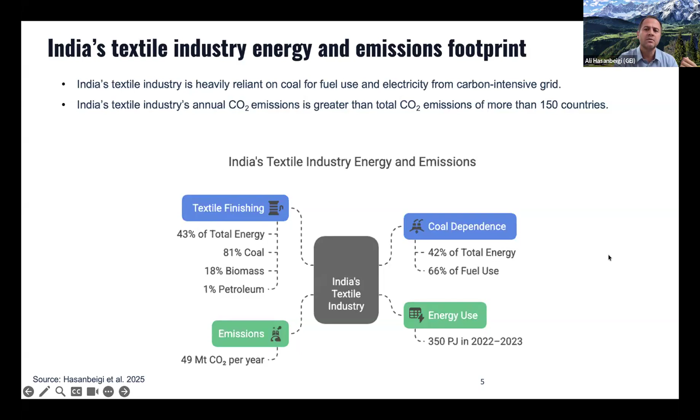So it's a big number we are speaking of. Therefore, a big challenge, but also a big opportunity to decarbonize. A significant portion of fuel used in the Indian textile industry is fossil fuel. Some biomass is also used, and there's a fair amount of dependence on coal, which is very carbon intensive. So that's what we want to decarbonize. Electrification allows us to phase out fossil fuel and then tie electrification to renewables in order to decarbonize.

In a textile plant, I think the majority of people in this session are working in textile companies one way or another. So you use electricity and you use fuel. A significant portion of fuel is used for heating, especially in wet processing facilities where we have pretreatment, dyeing, printing, finishing, etc. The electricity component to decarbonize is becoming more and more straightforward in many geographies, and fortunately in India, the past 5 years especially, a lot has changed in a good way, moving in the right direction with regards to corporate renewable energy procurement, which Puneet is going to talk about.

India is actually one of the best geographies in Asia when it comes to corporations procuring renewables. So that's good news, and it's more straightforward. We're not saying it's easy, you still have to go through the steps, but it's more straightforward. It's the heating that is challenging - how to decarbonize heat, meaning deep decarbonization towards net zero. That's where people are scratching their heads, and that's where electrification offers a real long-term decarbonization solution.

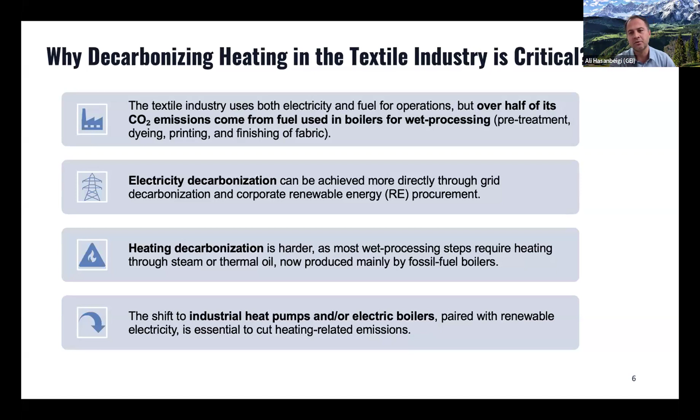Those are technologies like industrial steam generating heat pumps, electric boilers, and other technologies we have discussed before. But the two main technologies are industrial heat pumps and electric boilers that can replace conventional fossil fuel boilers, and then tie that electrified heating to renewables. There you go - you can get to net zero if you do it today, even today.

So we published a few months ago a major report, about 100 pages, on electrification of heating in the textile industry in India, where we did the analysis at 4 different levels: at the national level, at the state level for 3 major states - Gujarat, Tamil Nadu, Maharashtra - and at the cluster level, we did analysis for the Surat cluster and for a typical wet processing plant in India.

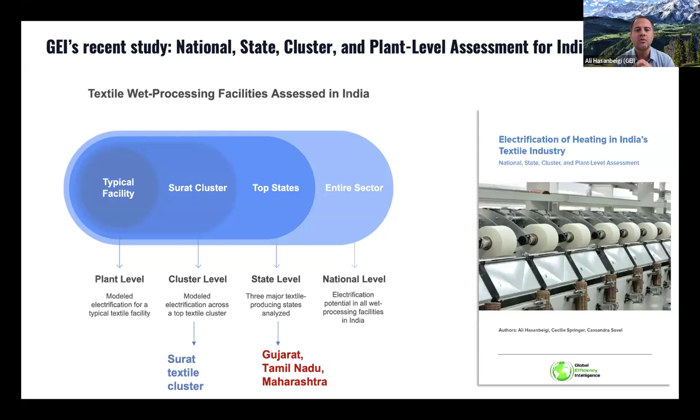We published a detailed techno-economic analysis of it - how much the savings, how much CO2 reduction, what would be the cost. So there you go for all the 'what' and techno-economic data of everything we are discussing today. I'm not going to talk much about that today, but that by far is the most comprehensive report published on this topic for India, I would say.

But very briefly, for those of you who may not be familiar, the two major electrification technologies are the heat pump - industrial heat pump - and electric boilers. When I talk about heat pumps today, I mostly mean a steam generating heat pump, because we do need steam for many processes in the textile industry. Even if they have lower temperature requirements, steam is needed to deliver the heat.

Heat pumps have been around for decades actually, there's nothing new about them. And steam generating heat pumps for high temperature are just emerging more and more, but they have been commercial, they have been around. The reason they have not been adopted is because the preconditions were not there - the economics, renewables, the policies, etc.

But now those preconditions are lining up. A heat pump is basically like an AC in reverse, like air conditioning. So it gets heat from a lower temperature. It's preferred to have some base heat, then uses electricity as an input to lift the heat and

delivers it at a higher temperature. It moves heat, it doesn't generate heat the way a boiler does. As a result of this moving heat, it can have extremely high efficiency, which is measured in terms of coefficient of performance, or COP. Heat pumps can have a COP of even 6, 7, or 5, but those are for lower temperature and smaller temperature lift. For a steam generating heat pump that we are talking about today, COP is usually between 2 to 3.

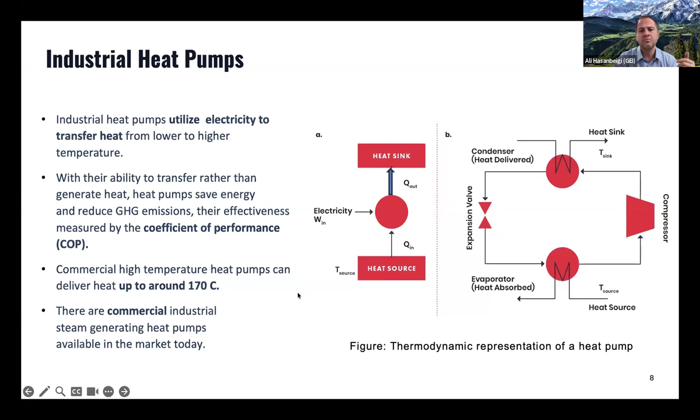In simple terms, that is 200% to 300% efficiency for steam generation. Compare that to 70% or 80% of a conventional boiler. So you can see heat pump is extremely efficient, and it can deliver steam up to around 170 degrees C, and some claim even higher.

Very briefly, some results of the study we did for India. This is for a typical textile wet processing plant. If you install a steam generating heat pump compared to a conventional coal boiler, what would be the annual energy use and annual CO2 emissions? The graph on the left shows the annual energy demand for a typical wet processing plant in India with 8,000 tons per production. You can see the conventional boiler requires significantly larger energy compared to the heat pump because of the efficiency gain I just told you.

And translating that into CO2, you can see the significant drop in annual CO2 emissions. The first bar is the conventional steam boiler, coal boiler, annual CO2 emission. The subsequent bars, the green ones, are for the heat pump in 2030, 2035, and 2040.

The emissions associated with heat pump operation, of course, depend on where the electricity comes from. So we have two scenarios here. The first bar for heat pump shows a scenario where we assume 50% of electricity comes from the grid and 50% through corporate renewable energy procurement, which Puneet is going to talk about. This is possible even today in India, by the way, we are not just hoping for something in the future.

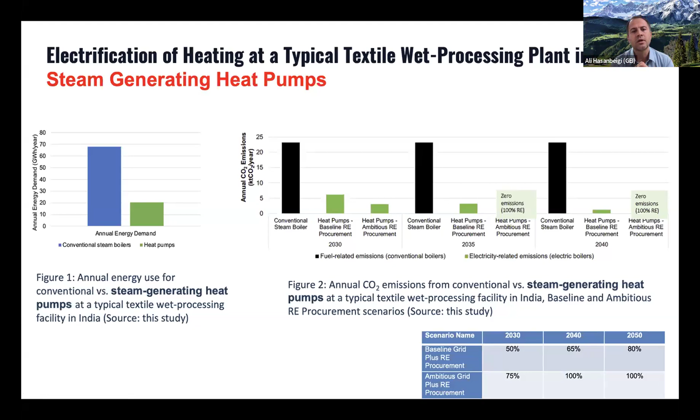And then as the grid decarbonizes, or as you include more renewable percentages in the electricity supply, you can get to significantly low emission or even zero emission. So this is a snapshot of some of the results of our analysis. Much more you can find in the report.

Electric boiler is another technology, completely different. It's fairly similar to a conventional boiler, but instead of using combustion fuel, it basically uses electricity. It's like your stove can be natural gas or can be an electric stove - it's basically the same concept, electric heating. I won't get into the detail of the technology.

There are different types for small or larger boilers. But electric boilers, basically industrial electric boilers, can give you efficiency of 99% compared to a conventional boiler of like 70 to 80%. So they're very efficient, but they are not as efficient as a heat pump.

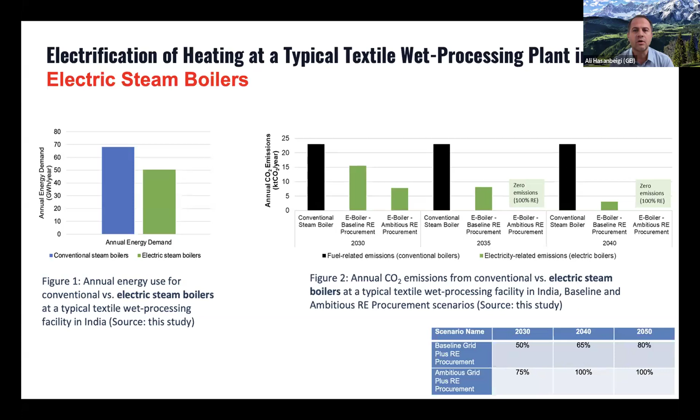Therefore, the technology of choice usually for electrification is the industrial heat pump. But industrial heat pumps have high capital costs, high capex, whereas much significantly lower energy and operational costs because of efficiency gain. Electric boilers, on the other hand, have fairly low capex - they're cheaper than even coal boiler or biomass boiler, but they increase your energy costs because electricity is more expensive. So there are pros and cons, and certain decisions need to be made based on that.

We have all that analysis and results in our report again that I showed you. But one snapshot of the cost analysis: we put all the costs - capital costs, operation costs, energy costs - into a framework of what we call levelized cost of heating. You annualize all the costs over the lifetime of the technology, take the net present value of that, divided by the heating it provides, and you get a dollar per megawatt hour of thermal energy provided.

These are based on actual cost data in India, so we have not made this up. This is also despite the fact that heat pumps have significantly high capital cost.

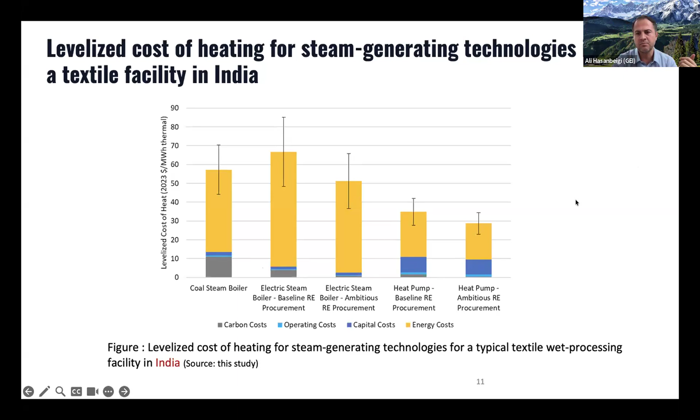So that was a very quick summary of a 100-page report into a few slides on why to electrify and what electrification is at a very high overview, and also what is the impact on CO2 and energy cost. Now let's focus on the main reason we are having this workshop: how we can electrify. To do that, we go through certain steps on how we can integrate electrification technology into a textile plant in India.

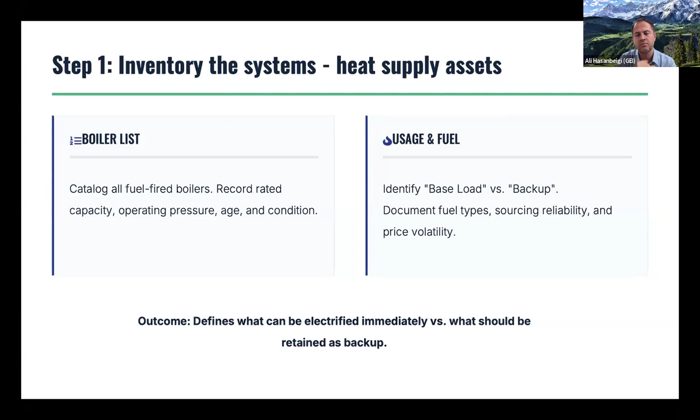This will help you define, based on your load and equipment, what you can electrify now or in the short term, and what you basically keep in terms of fossil fuel, and later on you can go and electrify.

So again, part of step 1 is mapping your steam demand. As you all know, steam is used in different processes, different machines, not in the same way, not in the same kind of pressure, temperature, time. So you need to map your steam demand and have your actual demand that is needed in different processes.

As you know, actual demand is definitely much lower than the installed capacity, and that comes into picture later on, as you will see. So you need to know what's your minimum demand, what's your average, what's your peak, and this will help you significantly to size your system properly, which has significant implication with regards to operation of your system and also cost.

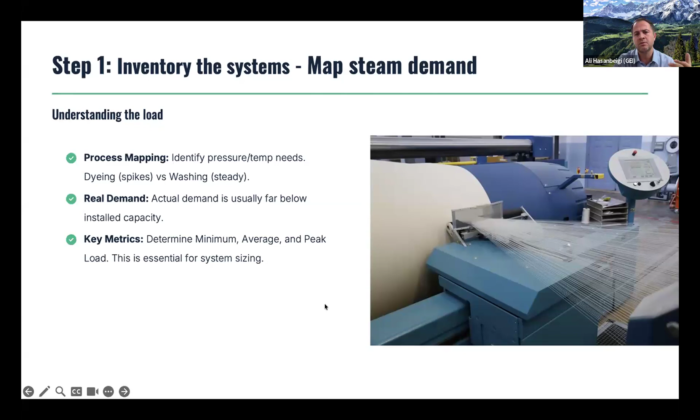Part of step 1, again, inventory of the system. You need to establish a baseline for your plant with regards to fuel use, energy use, emissions, and cost.

Fortunately, as part of your reporting, perhaps to different brands or other requirements, you might already have this: how much fuel you are using, what's the efficiency of your equipment, what's the emissions associated with the energy use, and what's the cost in terms of energy cost per kilogram of fabric, steam cost per kilogram of fabric.

One thing we would recommend also is levelized cost of heating. Actually, we have a tool that can calculate that for you. Later I will show you. So the more detail, the better, if you have this information.

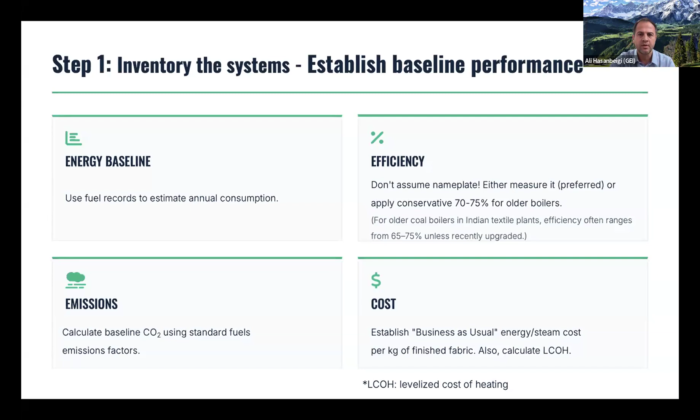This is all part of step 1. So step 1 is to establish the baseline, the data, and the better data you have, the better decisions you can make. Step 2 is selecting the strategy for electrification.

So electrification in one line is not an all-or-nothing decision. A lot of you might look into it and say, okay, this is not for us because, for example, our peak cannot be met with industrial boiler, electric boiler, or heat pump, and so on. This can be a hybrid strategy, which actually is what we are recommending, and a phased approach.

So what is this hybrid strategy that we are proposing? Meaning that you have a design where you electrify part of your load, let's say 70% of your load, could be 50% of your load, and should be base load most likely, especially if you are using a heat pump. And then for your variable load or peak, you can still continue to have your fossil fuel or biomass boiler as the peak or backup. And then in later stages, you can electrify those as well.

So this actually has an advantage because you are going to have some need for electrical infrastructure to connect your electrified heating. And the lower load that you have, the easier it gets to connect your new electric load, the heating, to the grid and so on, reducing the cost.

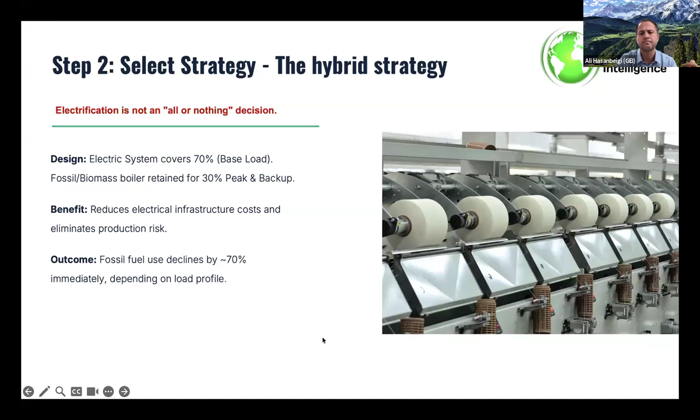But at the same time, even if you electrify 50% or 70% of your load, you're significantly reducing your emissions, and I'm sure you will meet many of your near-term targets. So keep in mind, hybrid strategy.

Technology selection. We have discussed it extensively in our reports, the one I showed you for India, but also we published two major reports in the past year. One was called Low Carbon Thermal Energy Technologies for Textile Industry, another one called Low Carbon Thermal Energy Roadmap for the Textile Industry. Each of them a 100-page report. It was supported by Apparel Impact Institute. I highly encourage you to look at those reports where we show the pros and cons of each of these major technologies.

But for steam, basically your choices are steam heat pumps or electric boilers. Steam heat pumps is the technology we would recommend first because, I mean, it's a no-brainer. You have a technology that has 200, 300% efficiency. Why would you go with a technology that has 99% efficiency?

But it does have high capex. So if you cannot afford that higher capex, then you can go with an electric boiler. And even though nominally it might have higher energy OPEX costs, there are conditions where, depending on your tariff, renewable procurement rate, etc., you could even in the near term get lower energy costs compared to boiler, including some carbon costs, etc. So it's not that electric boilers are bad. It's just that you need to look at all the pros and cons and your own conditions.

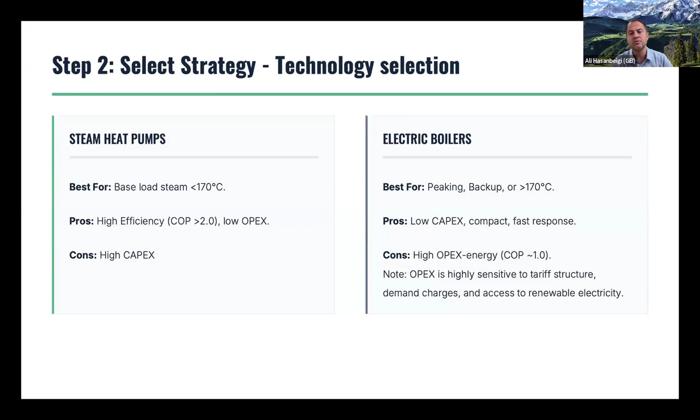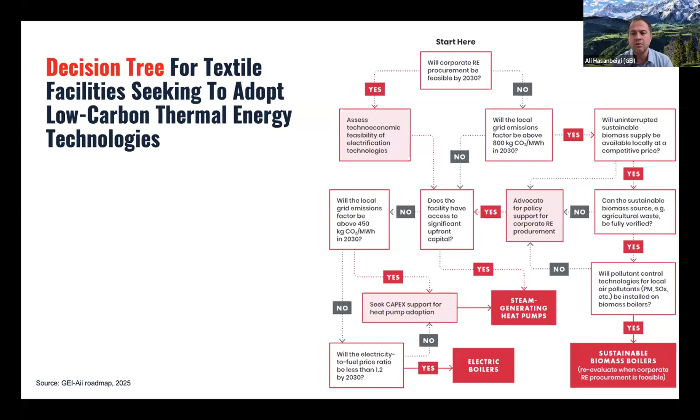To further help you, we developed this decision tree for textile facilities that want to adopt electrification technologies or look into biomass. I don't have time to run you through this decision tree, but basically, depending on your corporate renewable energy procurement options—which fortunately in India are moving in the right direction—and your electricity to fuel price ratio, it will guide you whether to install a steam heat pump or electric boiler. If certain criteria are met, it also guides you that it's okay to have a sustainable biomass boiler in the near term, but later on you can reconsider. So check out that decision tree from our previous publication.

The next step is assessing your infrastructure, because you get significant additional electric load that you need to connect, so you need to be prepared for that. Estimate your load first—if you electrify, how much will be your additional load? It's significant. Keep in mind, one additional benefit of a heat pump is that because of its 200 to 300% efficiency, it needs significantly lower load compared to an electric boiler, which saves you a lot of headache and cost when it comes to load connection.

But you need to look at your constraints too. For example, you might have a 1000 kVA connection, but if you electrify, you're going to need 2000 kVA—what do you do? The first thing you can do is talk to your electric utility and have them upgrade your substation. Or you can take a phased approach, and instead of electrifying 100%, you electrify depending on conditions, for example 50% or 70%, which means reduced load demand as well. So there are things you can do, but first you need to know what your load would be, and the tool I'm going to introduce will give you that answer.

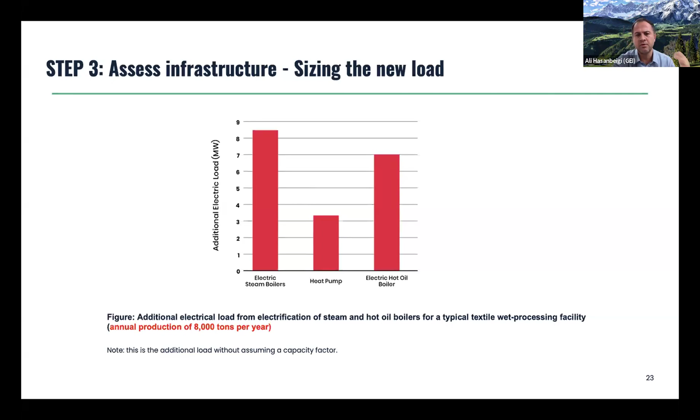In the study we did for India, for a typical wet processing facility with 8,000 tons per year production, we found the additional load is a bit higher than 8 megawatts if you use an electric boiler, but significantly lower—a little more than 3 megawatts—if you use a steam generating heat pump, because heat pumps are significantly more efficient. If you electrify your thermal oil boiler, which we're not talking much about today—you need a thermal oil boiler to have hot oil go through your stenter for heat setting—you can electrify that too. For such a plan, you would need around 7 megawatts additional electricity. These are the numbers; if you have significantly lower production, you can scale from there.

Once you have a good understanding of your load, step 4 is evaluating feasibility—technical and economical. For technical feasibility, you need to figure out how this new system, heat pump or boiler, gets connected to your existing facility. Space—they're going to need space, so where do you put all this? They're going to need maintenance—where do you get the maintenance service? You can do some in-house, but you need additional support. The best approach is to engage with vendors from day one. They will literally come to your site, visit, and tell you all the things you need and all the constraints you have, so you can make an informed decision.

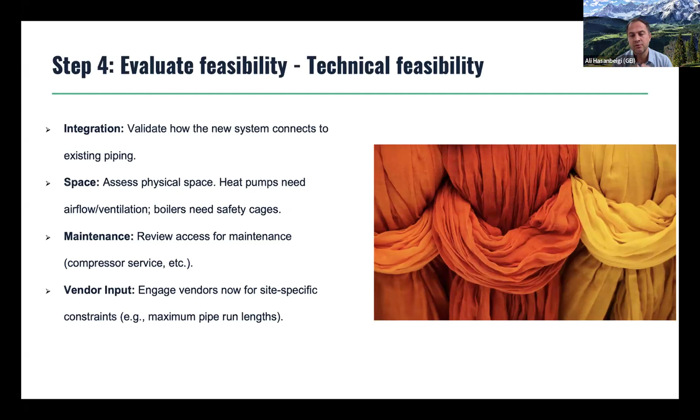Continuing on step 4, evaluating feasibility for production risk and quality—it looked like you were not that concerned about it from the poll. But these are slightly different technologies; heat pumps and electric boilers actually have more advantages, such as a faster ramp-up rate compared to coal or biomass boilers. That's an advantage, but you need to be aware that temperature stability is important, for example for dyeing. So from day one, involve your production and quality team, and they will tell you exactly the spec they need, so you design the system based on your production demand. To mitigate any risk, you can do electrification in a phased approach, as mentioned earlier. Typically, you want to run a steam heat pump as base load, very efficiently, and then have a boiler for the peak or variable load.

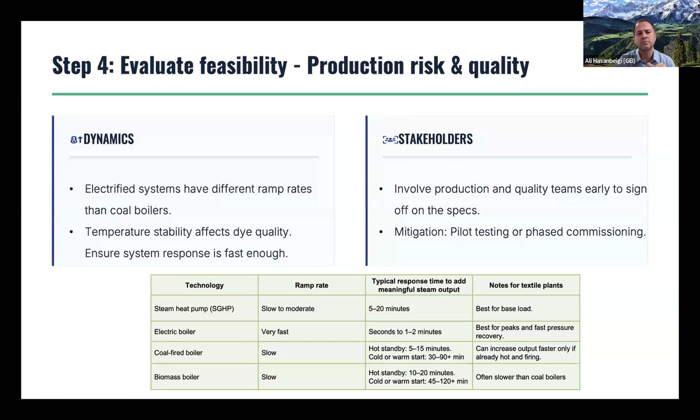Part of step 4, evaluating feasibility, I talk about technical and economical feasibility, CO2 and cost. So we do have a textile heating electrification tool, which we developed and published about a year ago. It's available for free in 6 languages.

You can download and use it today. It does a fairly sophisticated pre-feasibility study that if you hire a consultant, they would charge you tens of thousands of dollars. The tool actually has 2 modes: simplified analysis and detailed analysis.

In the simplified analysis, you can put just a few numbers about your production and annual energy use, and the tool has default values and will do the rest of the calculation by itself. Of course, if you run the detailed mode and put your numbers, the results are more customized to your situation. So we encourage you to run the detailed mode.

It does the techno-economic analysis, giving you information on heat pump, electric boilers, your current conventional boilers, coal, biomass, whatever you put in there. Also thermal oil boilers, if you electrify them.

It compares the annual energy use, annual CO2 emissions for 2030, 35, 40 running into the future. You can run scenarios with regards to renewable energy procurement percentages, and it can really do a fairly good detailed calculation depending on what numbers you put there.

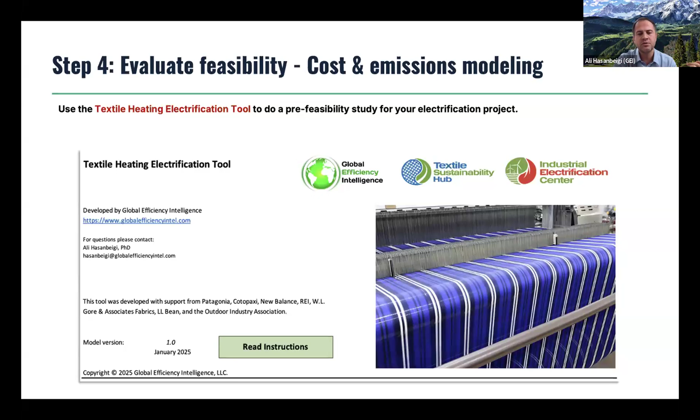And it does have a simplified action plan based on the result of your analysis. So once you get your result, based on that result, you get some action plan. It's a fairly detailed tool, I would say, while it's user-friendly and Excel-based. So I highly encourage you to run that for your electrification effort.

Moving on with step 4, the last part is you need to include non-energy, non-monetary benefits. Often electric technologies have better control compared to combustion technology, and better temperature controls and others improve your production quality and reduce waste, saving you money.

As I said, electric technologies have faster ramp up, so that helps you with production flexibility. Often the O&M is lower for electric technology, and they are cleaner. You have literally no local pollution, no air pollution, a safer environment for staff to work.

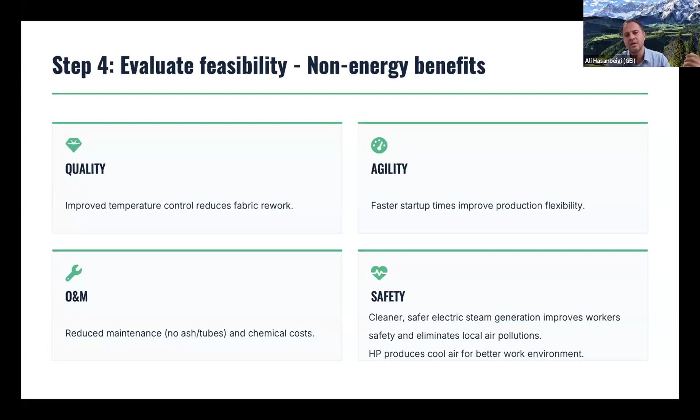And heat pumps actually generate cooling as a byproduct, which you can use for cooling the factory floors, the office workers, and all that. So it improves the working environment. These all have value that you need to take into consideration.

So I thought it would be helpful to also show some common mistakes that textile mills could make when electrifying. And I just got the alarm on my phone that I need to start wrapping up. So one common mistake is basically not sizing the system correctly.

You need to know your actual load, your actual temperature and pressure requirement, and don't size the system based on the nameplate, because that will significantly increase your capex and also significantly increase your future opex. Also, lower load demand is easier to connect to the grid.

Do not need to electrify 100% from day one. If you do, great. But if you cannot, you don't need to. You can do the phased approach.

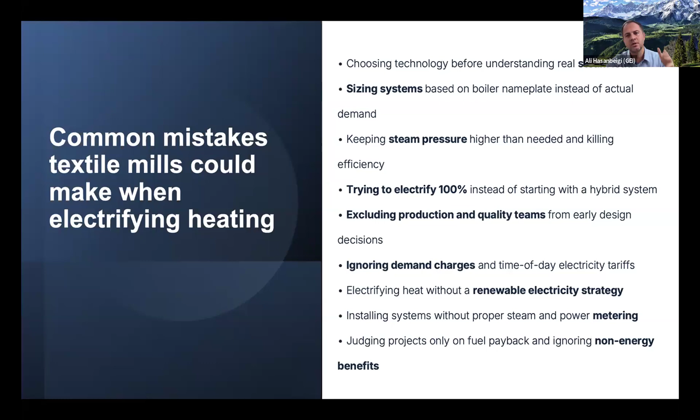Do not ignore the demand charges and other charges that your electricity bills have. You need to take everything into account when you do the economic analysis. And you certainly need to have a renewable energy procurement strategy from day one. Even though you want to do it gradually, you need to have that strategy from day one.

So let's move on for the interest of time. Financing, where the money comes from. You need to get the money from somewhere.

If you don't, you can go to the brands, if you're working with brands, supplying them. There are brands that are supporting decarbonization, even electrification. H&M and others, they are there. You can talk to them.

There are various strategies they use. Apparel Impact Institute, AII, published a report last year, Brands Playbook for Financing Decarbonization. It has a number of strategies there.

You can go to banks, especially banks that have green loans. In India, for example, SIDBI and others do have loans for decarbonization technology, electrification included.

And there are grants, like straight up free money. Apparel Impact Institute has actually a grant directly for electrification projects. So if you're considering electrification, the first thing you need to do is contact AII, because you might be able to get some money for your project.

I highly encourage you to read them, even though they're written for brands, but you are the supplier. You can see which one could work with you, and then discuss that with the brands you are supplying.

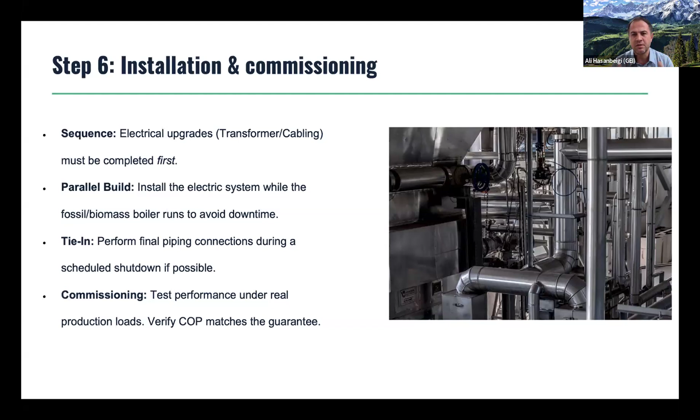To wrap up, once you have the financing, you procure the technology, then go for installation and commissioning. You need to sequence things: electrical upgrade, transformer, etc., need to happen first, or at least in parallel, before you install your heat pump, for example. You can build your electrified technology system while having your production running smoothly, and then once the project is complete, do the connection, preferably during the scheduled shutdown period. Then you have to test performance in the beginning, see if the COP, for example, the efficiency, is as the vendor advertised, and make sure everything runs smoothly.

When the operation starts, or before it starts, you need to train your staff - very important, how to work with the new equipment and the safety protocol. By the way, that's not a big deal. Industrial companies always do that, so it's not a deal breaker or anything.

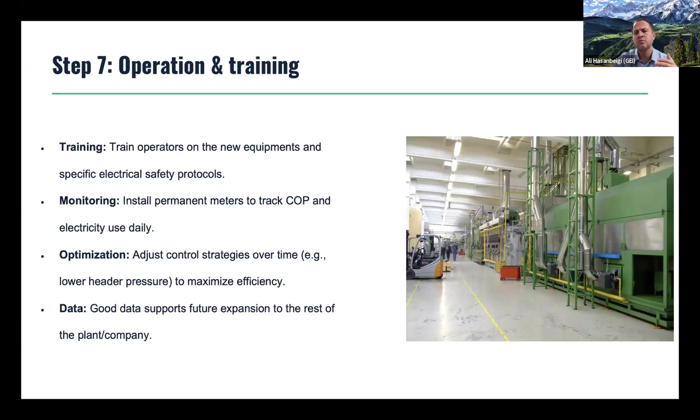Install a permanent metering system to measure efficiency and do optimization. One advantage of electric technology is that measuring electricity is much easier than measuring, for example, steam, and it's much cheaper. So you can take advantage of that, do proper measuring, and based on that, do optimization. I'm hoping with AI and everything, you are going to see advanced optimization systems come on top of these electrified technologies. Good data can help you with optimization and then help you with the expansion for the next phases.

The last step is self-explanatory: review what you have done, how things are performing, learn from the mistakes, the lessons learned. Most companies we have worked with have a second plan, then scale from there. But having learned what you have learned, I think the second project will be smoother. Or within the same plant, if you just electrify part of your load, like one boiler, you can gradually move to the next.

With that, I went a bit over time - sorry, Puneet, but thank you. We do have that report mostly focusing on the why and what of electrification, and we do have a chapter on how. But I hope you found this presentation helpful in terms of walking you through these steps. With that, I'll stop here and take questions at the end of our workshop, but I'll hand it over to Puneet to tell you the steps for corporate RE procurement, which you tie to electrification in order to get to net zero, or towards net zero. Puneet?

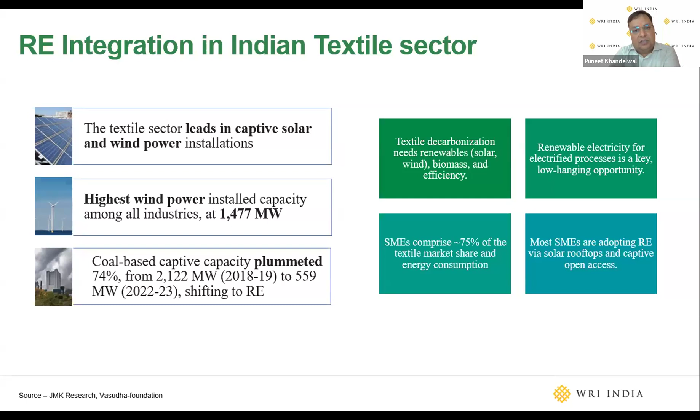One thing specifically to note about the textile sector is that it has a mix of all kinds of enterprises, from integrated mills to the MSME supply chain, small players as well as large players, which have different consumption loads across the supplier value chain of the textile sector.

The key growth drivers specifically for the C&I segment are definitely the ever-increasing cost of retail tariffs of utilities, where the C&I or commercial industry sectors suffer from the heavy burden of cross subsidization from other categories of electricity consumers. Power deficit is a critical risk with emerging demand from sectors like industrial heat and data centers - the scenario is building that if sufficient power is not there, cuts can be made to the industries.

Over time, we have seen that the RE market has developed a lot with many emerging options also there, as well as lowering cost of the existing and orthodox options in RE.

On regulatory compliance, this is also coming up and developing, with more enforcement now being applicable to the C&I sector with RPO obligations in place, and emerging compliances with respect to the carbon border adjustment mechanism for European countries impacting export-oriented units, as well as emerging disclosures for listed companies required by SEBI under BRSR.

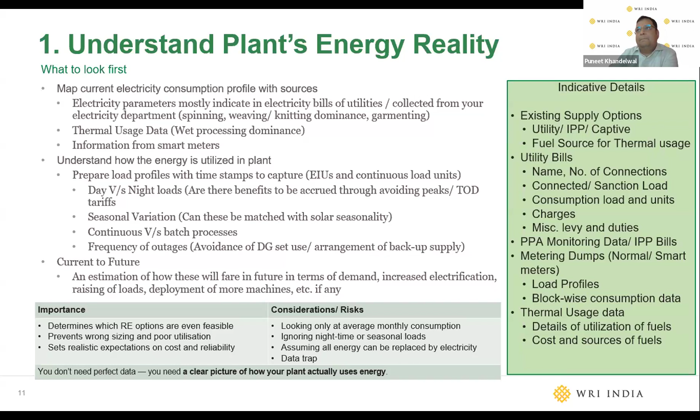So you have to first define your goals. Once you understand your energy consumption profile, the next category is about clarity of intent, understanding why the company is pursuing renewable electricity. Is it just pure economics versus reliability?

Today the discussion is not only on the economics of a particular option, but also the reliability. You cannot make your plant or machines suffer because of outages from discom or an energy deficit kind of scenario.

What is the buyer or client sustainability requirement? If you are an export-oriented unit, are there implications of EU regulations for which you are moving towards renewable energy? Or are there investor obligations coming, because more and more investors are now making their green commitments and investing in companies which are actually green compliant?

Further regulatory compliances, as already told, RPO obligations have been enforced in the Energy Conservation Act, targeting around 43% for the obligated entity by 2030. What are the current pollution guidelines?

One more thing specific to highlight is that even consumers are now getting very much aware about whether they are procuring a product produced from green energy, and that creates scope 3 obligations for the big apparel and garment manufacturers, which have bearing on the textile companies.

What are the reliability and energy security concerns, as I explained? And definitely there are greater social obligations for entities, and we have observed several companies who, apart from economics and other considerations, are considering their larger social obligation towards adoption of RE and removal of emissions from their plants and units.

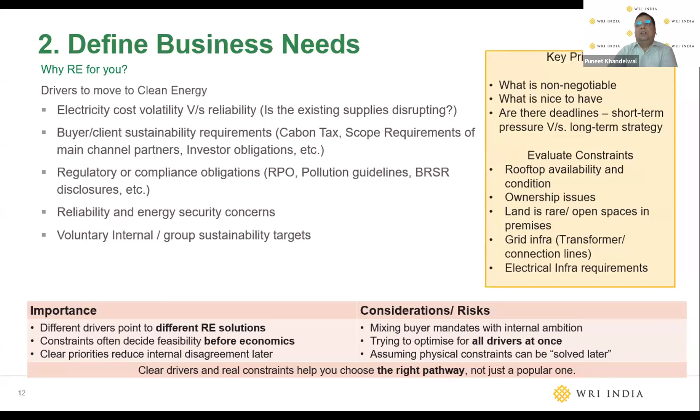Rooftop solar, which is available with net metering, gross metering, and virtual net metering, has also been introduced in several states, and is preferably taken up by smaller consumers and those who have daytime loads.

Third-party RESCO mode for rooftop solar, OPEX and PPA mode for captive and group captive through IPPs, are also preferred options for large integrated textile units, as well as those with continuous loads and combined cluster demand. I'm talking about cluster demand because green energy open access has now introduced demand aggregation in several states.

Whereby a particular consumer having multiple connections can get a combined capacity green energy open access from a utility, based on several conditions.

Other options picking up are purchase from exchanges, which is mostly followed for urgent procurement to meet RPO obligations, and purchase of RECs for meeting RPO deficit. But the markets haven't had enough turnover and volumes to affect the exact prices desired, though the current prices are motivating people to opt for these options.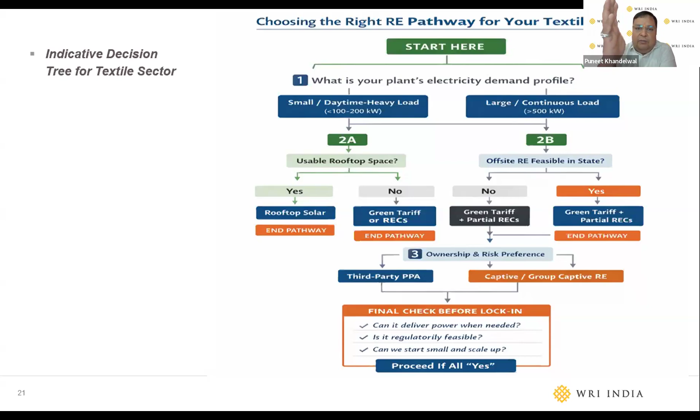The final check before locking in is whether this particular model is ready to deliver power when needed, whether it is reliable, whether it is regulatory feasible, and whether you can start small and scale up - maybe starting at 20%, 40%, and then going ahead with full decarbonization.

You are making a long-term choice, so you have to carefully and wisely decide about capacity sizing. Based on our surveys in several clusters, we've noticed that it's best to start with 40 to 70% of demand, particularly for open access contracts. Over-contracting leads to underutilization and can erode your financial savings if not planned or structured properly.

One important thing when evaluating a PPA structure: change in law clauses, curtailment provisions, scheduling responsibilities, and how risks and penalties are shared between the developer or supplier and the procurer - these clauses must be carefully evaluated and negotiated. Tenure flexibility, performance guarantees, right of refusal and its cost, and obligations related to CEF are also important things to consider while devising a PPA structure or contract with a supplier.

Internal alignment is essential - as I've emphasized, plant teams, finance, and senior management must understand these risks and assumptions. Conservative modeling and phased approaches significantly improve the approval process. This is the category where most value is either created or lost, so you have to spend time properly devising this RE strategy.

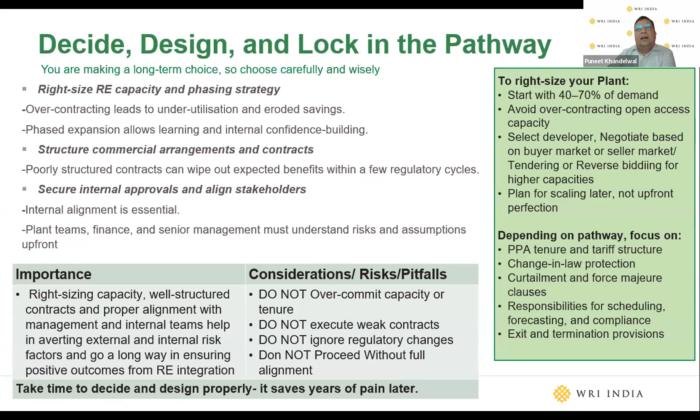One important consideration is to be watchful of regulatory and policy changes - that is one of the biggest risks going ahead in electricity procurement. The last step is implementation, and one key consideration is the gestation period of a particular option: the attention required for approvals, and how the engagement with utilities and regulators is. When I talk about practical implications, some things are regulatory or legally allowed, but practical considerations are more important in evaluating certain options.

You have to regularly monitor performance, cost, and compliance related obligations, specifically when you have a captive green energy or IPP based green energy open access arrangement.

And further, you have already done a lot of work when you move ahead with RE procurement. With the growing options and landscape of RE procurement, you have to optimize and diversify your RE portfolio over time. There are more hybrid options available now, and storage costs are going down, so people are evaluating C&I sector distribution level storage options to have that RTC kind of supply or backup supply. So these are some of the steps.

Due to time shortage, I will be closing this, and maybe we can get into the questions. Just one minute I will take before closing.

Along with CII, WRI India has launched a Synergy Alliance in September 2025, a C&I sector focused alliance which creates a broader buyer platform to leverage aggregated demand to seek policy and regulatory changes, establish demand for green electricity from clusters of industries to electrify low to medium heat temperatures, and explore various applications, models and technologies to bridge the demand supply gap of RE adoption at scale.

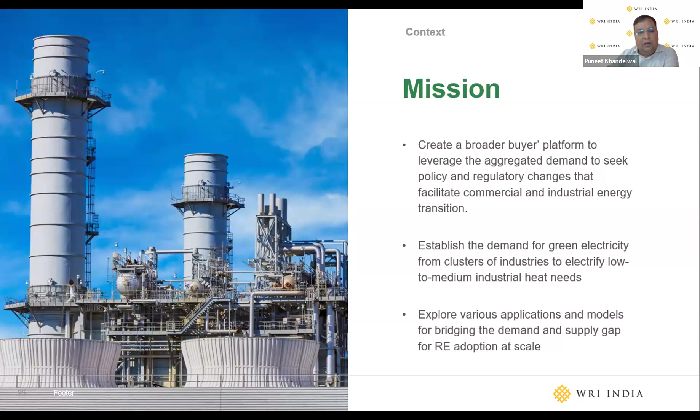Thank you so much, Puneet. As you all saw, there is a lot of content. As I said, our first challenge was the time, how to compress everything into such a short period of time.